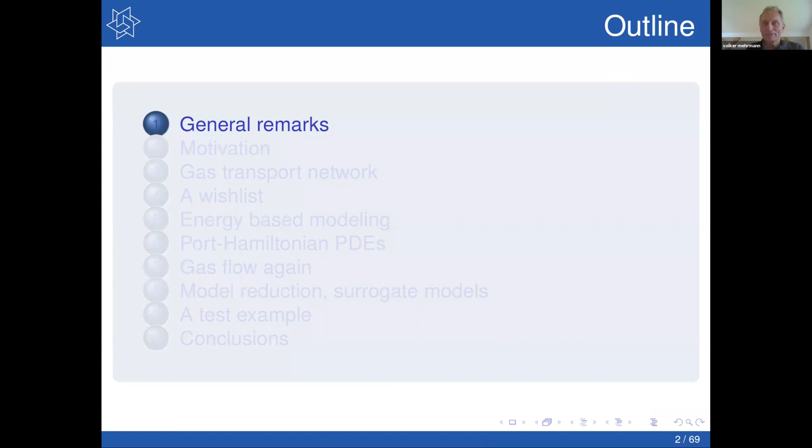I would like to talk about modeling, simulation, and control of systems, and let me start with some general remarks. We all know that most modern technologies require modeling, simulation, optimization and control of complex dynamical systems. But most real-world systems are multi-physics systems, combining components from different physical domains, also different accuracies and different scales in the components. In recent years, modeling has become exceedingly automatized, linking subsystems or numerical methods in a network-based fashion.

And the newest hot topic in this respect is the so-called digital twins, which means a real world system is combined with an artificial virtual system, and they permanently exchange data and run for their whole lifetime.

It's my strong opinion that modeling, analysis, numerics, control, optimization, and also data science techniques should go hand in hand. In recent years I have been working a lot on model reduction, and that will be part of the talk as well.

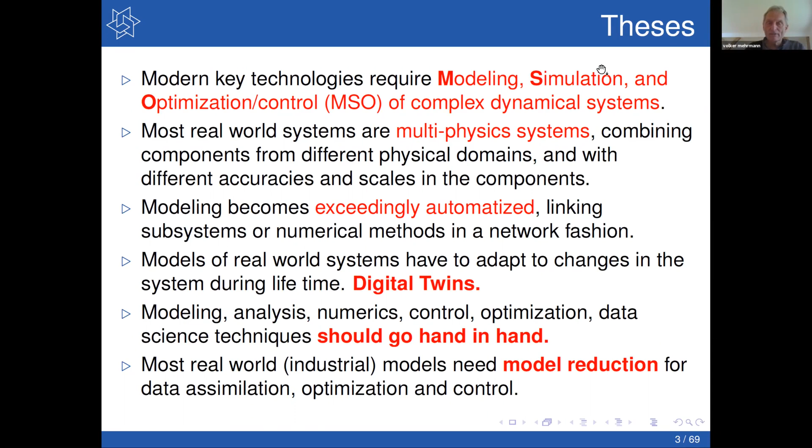So let me continue with the motivation for what I'm doing. You all know that the German government decided to move out of nuclear energy some years ago, and recently also to very much move out of coal, which means the energy supply has to be complemented by sustainable energy. I show you here a figure of the plan of the German government to increase the ratio of sustainable energy.

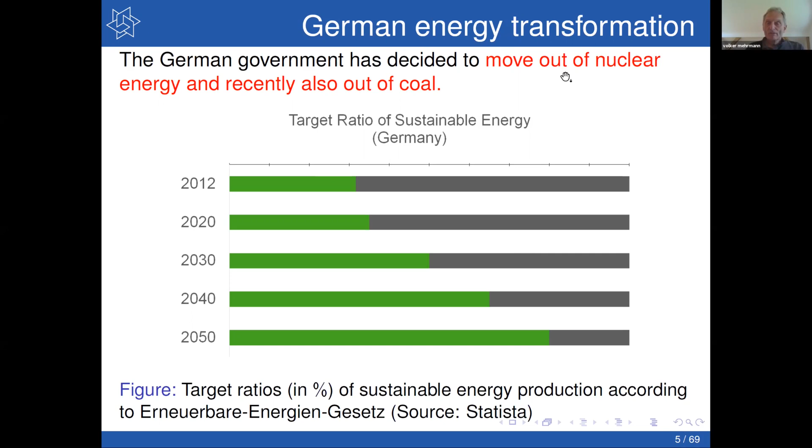This is the goal. And at the moment, if you look for example at a day in September 2018, you can see the use of energy is very much volatile. It's changing a lot during the day and during the days, and it's very different which energy source is used.

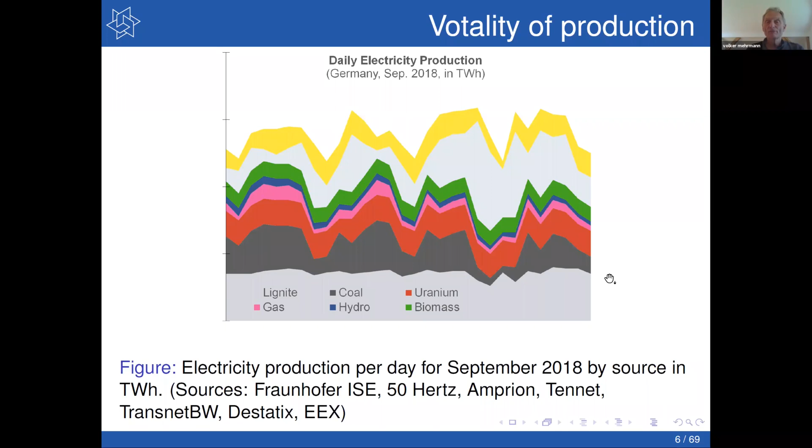Having this in mind, a certain number of challenges appear. First of all, the security of energy supply has to be guaranteed. Different energy sectors have to be coupled, for example green and fossil energy, for example power to gas and gas to power. The energy conversion should be efficient.

But when you do that and combine different energy sources, you have the problem that the different components of energy networks have very different modeling accuracy, and they live on different timescales. So, as I showed you in the picture, you have to deal with increased randomness and also decentralization. Nowadays many people have a solar panel on the roof, or there is a farm with a windmill, and things like that have to be combined.

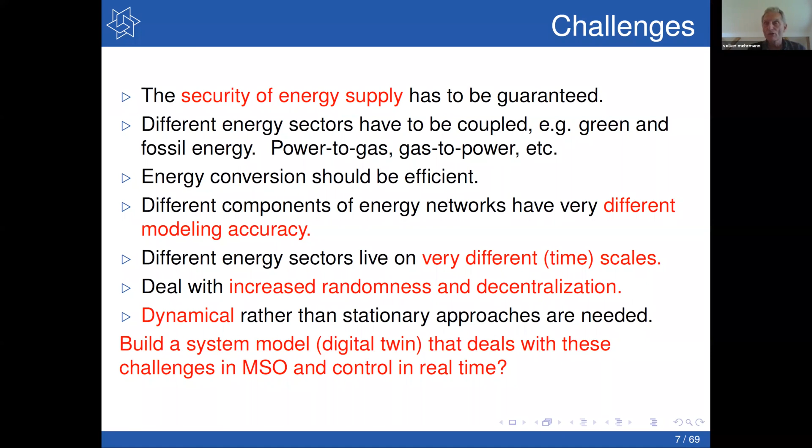And if you look at the energy system at the moment, it's mostly done in a stationary way, and so what we need is a dynamical approach. The long-term goal would be to build a system model, a digital twin, that can deal with these challenges in modeling, simulation, optimization, and control in real time. So this is the motivation for what we are doing.

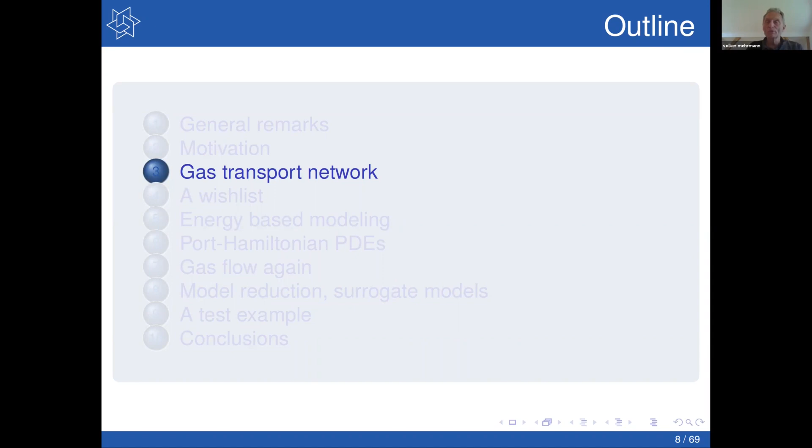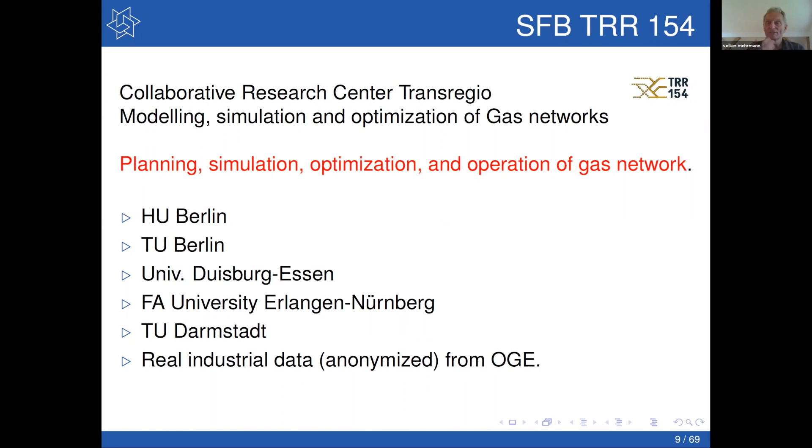As my model problem, I will talk about gas transport networks. This is a joint research project with several universities in Germany and some industrial partners. The question is, how do you plan, simulate, optimize, and operate real-world gas networks? So what does the gas network consist of? It's a large network of partial differential equations plus constraints. These are typically the Euler equations with temperature to describe the flow in the pipes. Then you have a network.

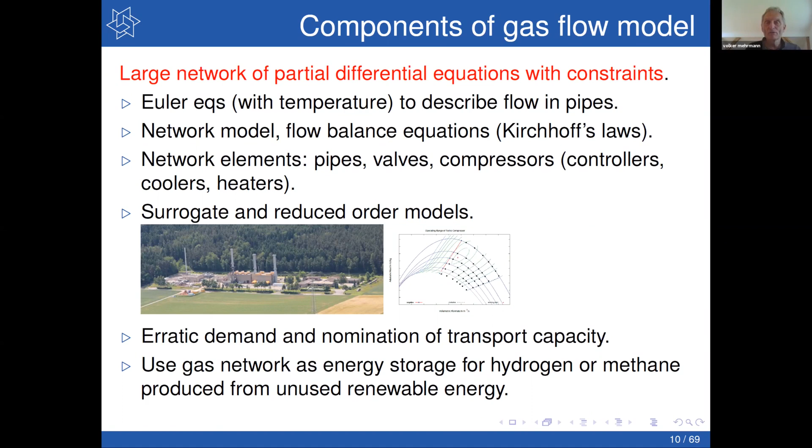Also, when you want to move to more and more renewable energy, the gas network is really a perfect energy storage for hydrogen or methane produced from unused renewable energy. The German government has just put hydrogen as a focus research point. So you can see there's a lot of difficulties here.

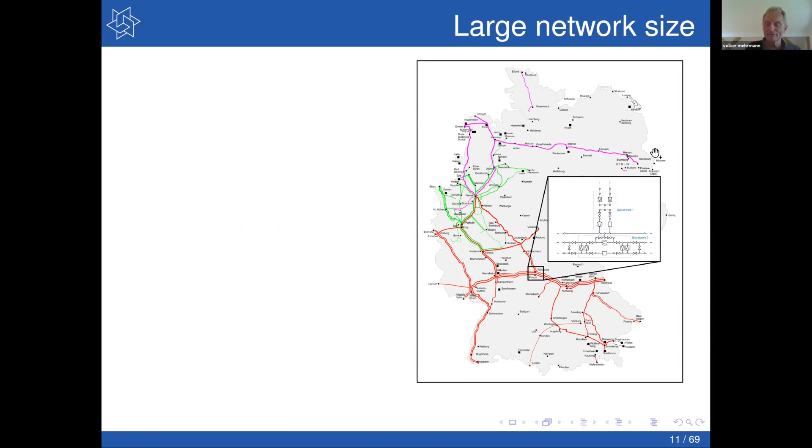Then what comes on top of it, is that such a network is huge. So this is a map of the pipelines, the major pipelines in Germany. But then if you go to this little node here, this looks like this. And then every little node in there looks like this. And then it comes to the households and it again looks like this. So you have a huge network.

So what do you have mathematically? You have a network of coupled PDEs for the flow. You have discrete and continuous PDEs for the valves, so switching. The compressor station is really given by a complicated control system that achieves a profile - that's pretty much a pure data-based model. And if you wanted to consider mixtures of, say, hydrogen and methane, you would have to go to 3D instead of 1D.

And the interesting question is, which model should you choose in which situation? How can you achieve real-time control? And then how to bring switching, delay, stochastics, and coupling to other domains. And for this, we would like to build a digital twin for the prediction and for the operation and for optimization and model reduction. So here we go.

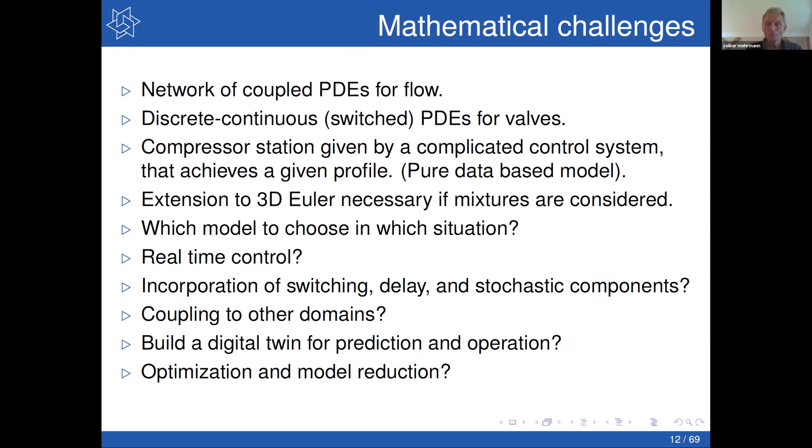So let's look at the PDEs. The most classical model in these pipeline models is the compressible 1D Euler equations. You have the equation of mass conservation - rho is the density and V is the velocity of the flow, X is the space variable, T is the time variable. Then you have the momentum balance, which includes also the pressure and the nonlinear term in the velocity, and a term associated with the friction. So lambda is a friction coefficient. It also includes the diameter of the pipe, and it's also nonlinear.

And then you have a term that has to do with the flow when you flow downhill or uphill. So there is an H missing here, where G is the gravitational force, and h, which should be here, is the height of the pipe. And then you have the energy balance, where E is the internal energy, T is the temperature, TW is the temperature of the outside world from the pipe, and KW is the heat transfer coefficient. So you have this nonlinear system of PDEs.

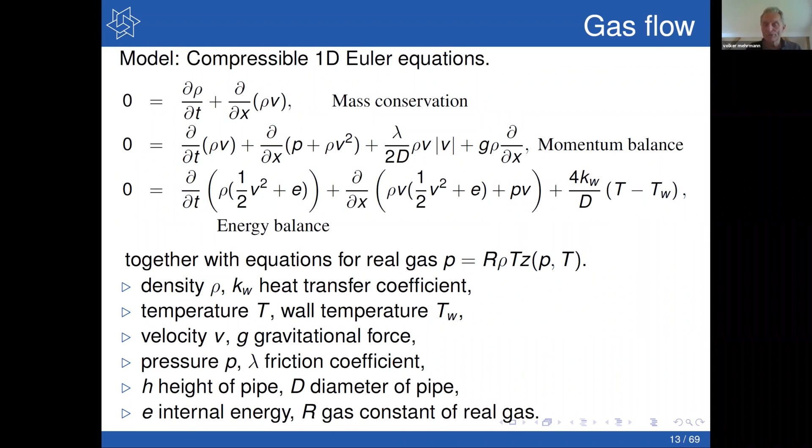You have this in every piece of pipe, and now you want to combine this with all the different parts of the system. So in our big research project, which is about 20 projects, we have taken this model, the Euler equations, and have created a model hierarchy. We take the Euler equations, and say, okay, the velocity is small, then we just drop the small terms. We could go to a simplified equation by taking that the time derivative of rho v is small. We could go to a stationary model, or we could set the temperature to be constant.

And then we have such a whole hierarchy of models, including an isothermal algebraic model, which is a so-called Weymouth equation, which is just mapping inputs to outputs. And every element or node or edge in the network is modeled via such a model hierarchy, including surrogate models, which could be reduced order models of each of these components.

And if you have such a model hierarchy, you can not only do what we are used to in the numerical solution of PDEs - space and time discretization - but you could also do model adaptation. So you could switch between the different models. And we have implemented that for a large part of the model. For example, here's a little test network - doesn't matter how it looks like.

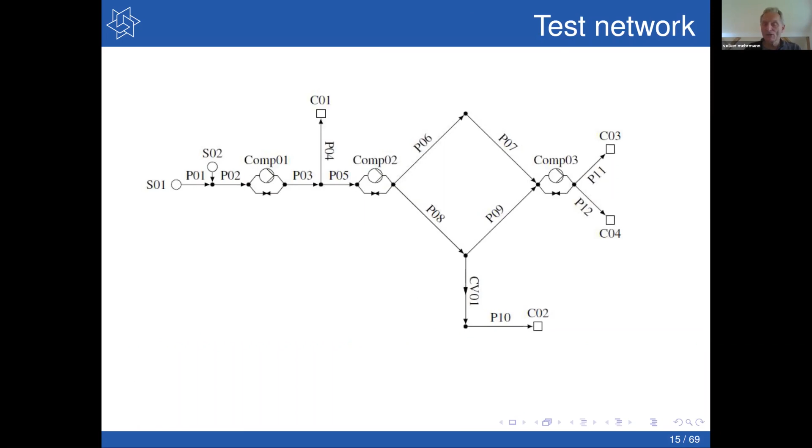We have implemented a space, time, and model error control strategy. Eta M is the model error, eta X is the space discretization error, eta T is the time discretization error, and JP is the number of pipelines. We sum the total error over all pipelines and keep it below a certain tolerance, and then optimize this cost function to minimize computational cost. If you do that, you can really reduce computing time substantially.

I don't talk about the references here. They can be found in the slides which are available for you.

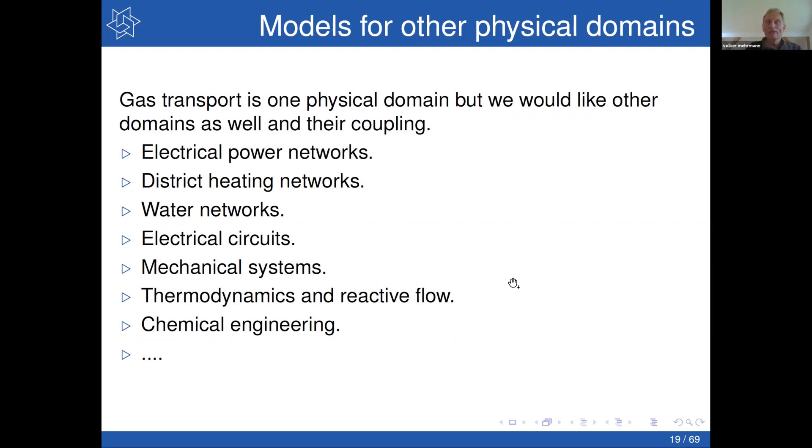What should such a model or representation do? It should work across different scales and physical domains. And we want a representation that is close to the real physics, not only for open systems, but also for closed systems.

As mathematicians, we would like to have nice algebraic, geometric, and analytical properties, and we would like to be able to analyze the model concerning existence, uniqueness, robustness, stability, uncertainty, errors, etc.

We don't know whether the variables we commonly use are the right ones. Maybe other engineers use different variables, so you would like to do coordinate transformations in space and time. Ideally, you would like to have a normal form. The whole thing should also be easy for space and time discretization and for model reduction.

Is there such a jack of all trades? In Germany, we have a very nice word for it: eierlegende Wollmilchsau, an egg-laying wool milk sow. The question is, is there such an animal?

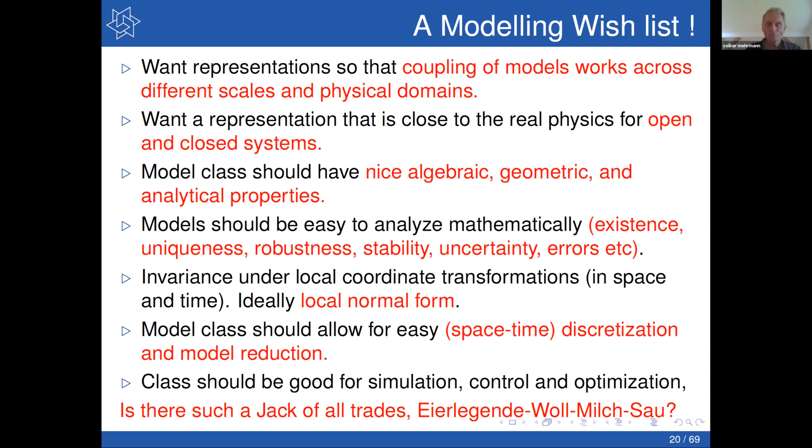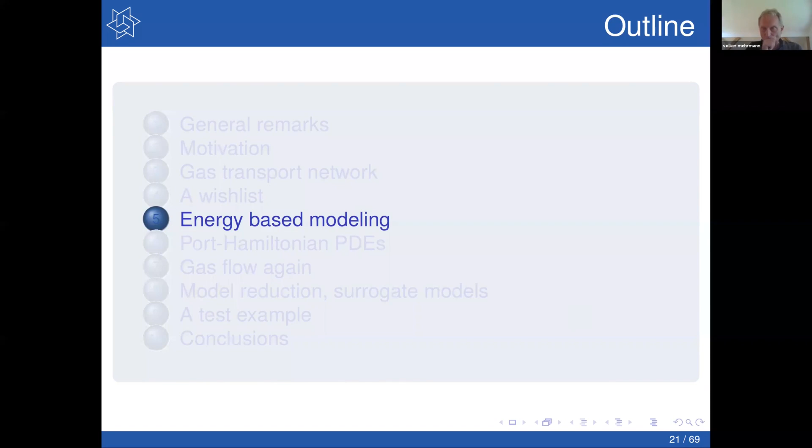The basis for such a modeling paradigm change is what is called energy-based modeling. The idea is to use energy, the only universal physical quantity, as a common quantity of different physical systems, connected as a network via energy transfer. You split the components into energy storage elements which store energy, energy dissipation elements which dissipate energy, and control inputs and outputs, including boundary conditions, as well as interconnections.

You combine them with a geometric structure, which is called a Dirac structure. We also want every submodel to be part of a model hierarchy, as I presented, of fine models, coarse models, or reduced models, continuous or time discrete.

The system theoretic approach to realize this is the concept of dissipative port Hamiltonian systems. This is about 20 years old, starting around 2000. There are some groups in the Netherlands and in France, van der Schaft, and also Bernhard Maschke from Lyon. There are also groups that do software for this, like Peter Breedveld, and groups who have worked on PDEs, Birgit Jacob and Hans Zwart.

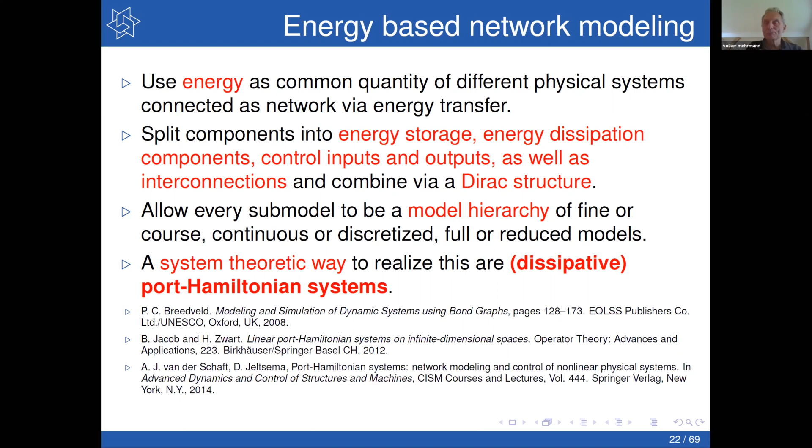I would like to tell you a bit about this approach and how we use it. For every system, you define so-called flows F, efforts E, and ports P. Then you have storage elements, dissipation elements, and a connecting structure called the Dirac structure, which always contains links describing the efforts and links describing the flows. Then you put everything together in a network.

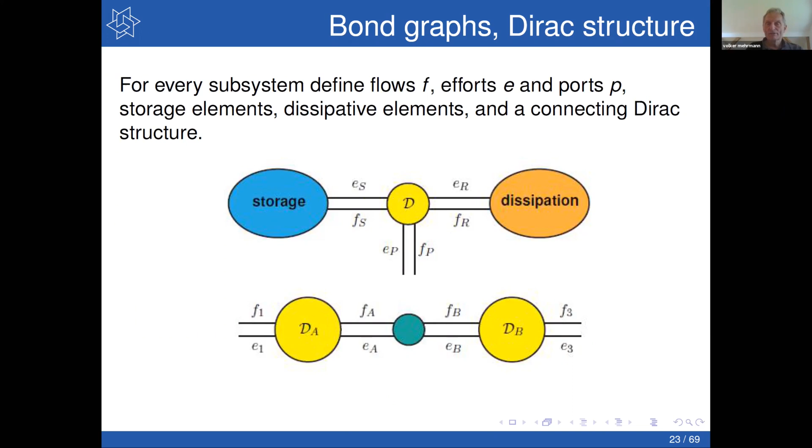Let me start from basics. What is a classical nonlinear port Hamiltonian ODE or PDE system? It's an ordinary differential equation of the form x dot equals (J minus R) times the gradient of a function H, which is the Hamiltonian. I will come to this in a minute.

Plus you have another operator here, which maps the input to the state. You have an output equation, which takes the state, here with B plus P, and then the gradient with respect to the state of H. You may have a feed-through term S plus N times u. So x is the state, u is the input, and y is the output of the system. H is the Hamiltonian; it describes the distribution of internal energy among the energy storage elements.

J is a skew symmetric or skew Hermitian matrix function which describes the energy flux among the storage elements, so it describes how energy is routed through the system. R, which is a self-adjoint, semi-elliptic, or symmetric operator that is semi-definite, describes the energy loss in the system, the energy dissipation.

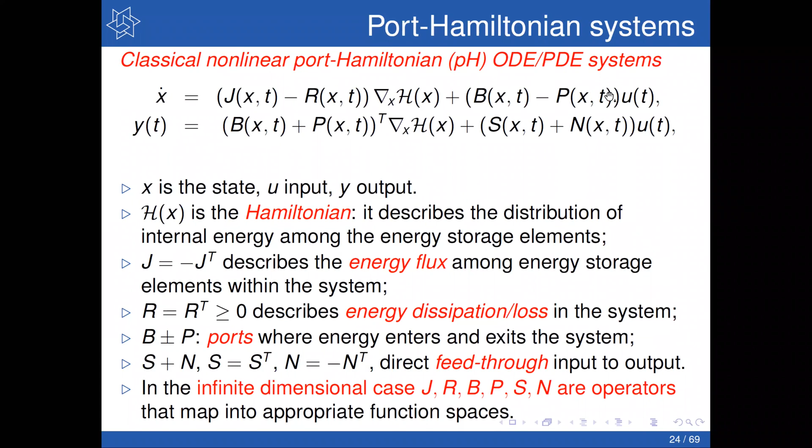And the interesting question is, why should this be a good idea? First of all, these port Hamiltonian systems generalize classical Hamiltonian systems. That's pretty good, that's already a big part of systems in physics, and also gradient flow systems, which is very common in thermodynamics.

You don't have conservation of energy anymore, but you have the so-called dissipation inequality. That means the Hamiltonian, the energy functional, at the state at time t1 minus that at time t0 is bounded from above by the integral over the input times the output. Or you could say this is a duality pairing between input and output.

And you can see if you don't put energy in or take energy out of the system, then this inner product is 0, then you have that the Hamiltonian difference is less than or equal to 0, so that's the energy dissipation. And if you don't have dissipation, then you have equal to 0, and that's the classical Hamiltonian system. So that's the first thing.

It's good that we can generalize classical physics, but the really nice thing is that port Hamiltonian systems are closed under power-conserving interconnection, so you can do modularized network-based modeling. Port Hamiltonian systems are typically stable and passive because the Hamiltonian is a Lyapunov function. And this port Hamiltonian structure you can preserve under Galerkin projection and model reduction, which is also very nice because that's what we want to use it for.

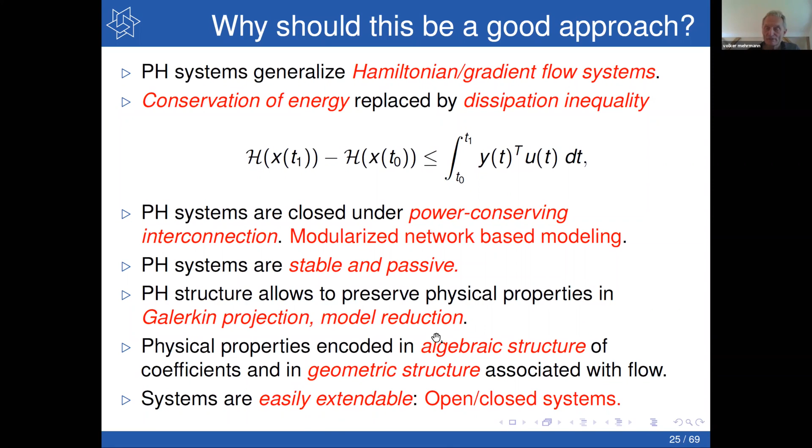And then there's some very nice algebraic and geometric structures, algebraic with the coefficients and geometric with the flow, and I will come to this. And you can easily extend these systems by adding new variables, adding new systems. So that's the classical port Hamiltonian system.

But when we have networks, we need a little bit more. We need algebraic constraints. For example, if we wanted to go from compressible to incompressible flow, then we have Kirchhoff's laws, which say flows over one node add up to 0. They could be mechanical systems with position constraints or conservation laws, other conservation laws than energy. And so you want to define port Hamiltonian partial differential algebraic equations, PDAEs.

And you want to define them in such a way that as many points as possible on the wish list of modeling that I showed you are satisfied. There have been many attempts in the last years, it's a very, very active field. And I will show you one or two approaches that we did.

So the first generalization which we did is with my PhD student, Riccardo Morandin. So you define yourself a state space and the time interval, state space X, time interval I, and you look at the Cartesian product of I times X, that is your S. And then you consider an equation which looks almost like the ODE case, but now you have an operator here in front of the X dot, and this operator can be any rectangular matrix function.

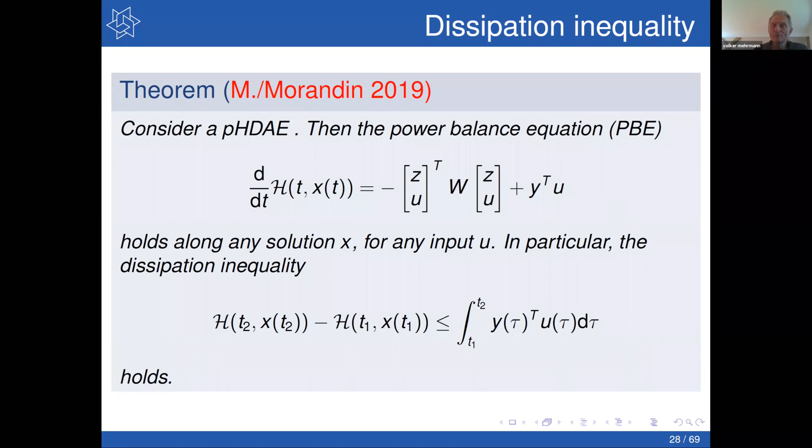Why did we do such a complicated structure? The reason is that we would like to have local or global diffeomorphisms, so we would like to do coordinate transformations. The first theorem here is that if you have such a port Hamiltonian differential algebraic equation and you do a mapping, x equals phi of t and x tilde, which is a local diffeomorphism, and you choose u as well, that is pointwise invertible, then I can do a change of variables.

I get a similar system where E tilde is E connected with phi, and then the derivative with respect to x tilde of the phi function. The J is this combined function, the R is this combined function, combining the old R with the time derivative of phi, and so on. Then this is again a port Hamiltonian DAE with a Hamiltonian H tilde, and to any solution there corresponds a solution of the original port Hamiltonian DAE with this transformation. If this is a global diffeomorphism, then the two systems are really equivalent, so there's a one-to-one correspondence. So we can do changes of variables.

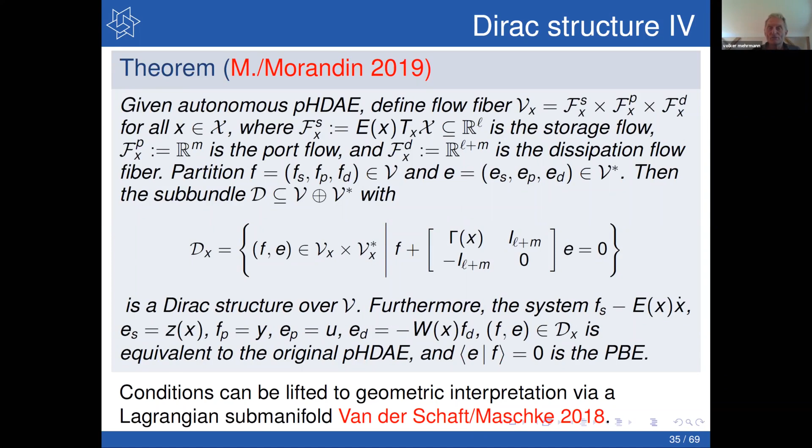And all this can be interpreted also with Lagrangian submanifolds. There's a paper by van der Schaft and Maschke that shows it. So this was just a little bit of the idea of why and how you can build such port-Hamiltonian systems.

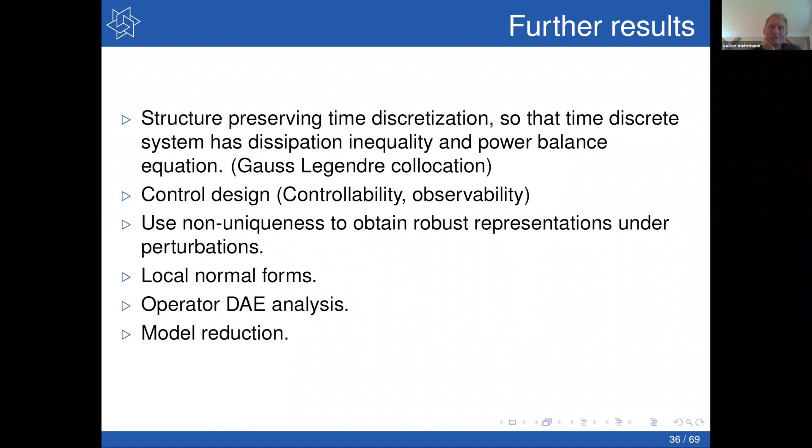We have done a lot of work on this in the last years. We have looked at time discretization, so that the discrete time system has the same dissipation inequality and power balance equation, and so far the only methods that do that are Gauss-Legendre collocation methods. We have also discussed controllability and observability. There is a non-uniqueness in the representations, so there's this change of coordinates that you can do, but there's also other non-uniqueness, and that you can use to make a very robust representation. And we have derived local normal forms, and we have also done operator DAE analysis.

So just a simple case: let's look at the case that we have a constant coefficient system. It would look like this: you have a matrix E here, and let's look at the square case. E x dot equals (J minus R) times Q x, and this is with a quadratic Hamiltonian, plus the input and output equation. And now Z is Q times X, and E x dot, there's no K term because you have constant coefficients.

And this operator, actually this term shouldn't be there, so this operator without the K here should be skew-adjoint. This inner product should be semi-definite, and this matrix should be semi-definite if we have a Hamiltonian like this. I will come back to this for a second to just give you a few results.

For example, you can easily get very nice results about the spectral properties of such an operator. If you have such an operator, you look at the matrix pencil associated with this system, lambda E minus (J minus R)Q. If you have an eigenvalue of that pencil, then the real part is less than or equal to 0, so you are in the stable regime. If you have an eigenvalue on the imaginary axis, then it's semi-simple, except for 0. And if the columns of V form a basis of the deflating subspace, then the dissipation RQV has to be 0. So the 0 eigenvalue is really associated with something which is in the kernel of the dissipation operator. And then there are eigenvalues at infinity and 0, and they can have at most Jordan blocks of size 2.

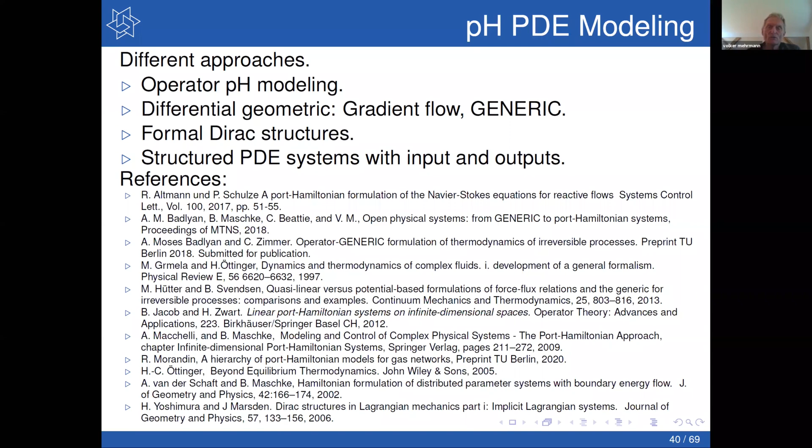So the abstract port-Hamiltonian operator-like formulation. Now I forget about the E here for a second, I will come back to the E a little bit later. So take the ODE-PDE formulation: I have a state variable Z, I have J minus R, then I have the Fréchet derivative of the energy functional, and I have an input operator and an output operator.

A state space would be something like Sobolev space W13, living on an interval 0 to L into R3. J is a skew-adjoint operator. R is a self-adjoint semi-elliptic operator. And B is linear and continuous, for example mapping from U, a subspace of LQ, into LP. The system-theoretic output is denoted by Y, and E here is a relative energy. If you want to read more about this, there's a paper by my student Ari Badlyan, and Bernhard Maschke, Chris Beattie, and myself.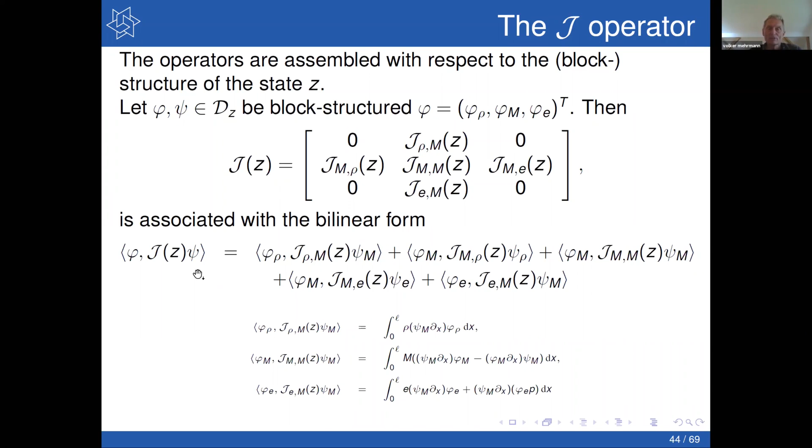As the derivatives with respect to the density, with respect to the momentum, and with respect to the internal energy. And you can also put the operators in a block form, then you get a J form, and it takes skew-symmetric parts which relate the density and the momentum, and momentum to energy. And you have a bilinear form associated with this. This is probably too small for you to read, but you do multiply with test functions in the usual way and get this bilinear form associated with this skew-symmetric operator.

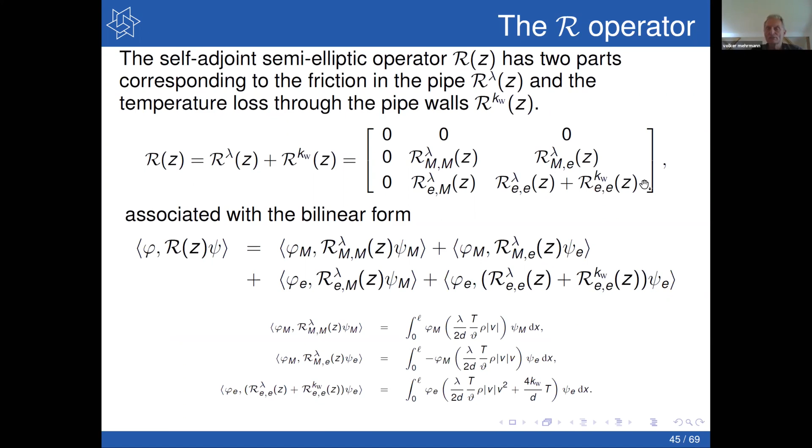And you can do a similar thing for the dissipation operator corresponding to the friction in the pipe and the temperature loss through the walls. It's a semi-definite block matrix function, operator function, which has a component with respect to momentum to energy, and then here the term associated with the dissipation of energy, and again a weak formulation.

Then you have to do something with the inputs and outputs, and I'm going to skip that, but you can define output and input operators. And in the equations, we had the Euler equations before without the entropy equation.

So what you do is the operators have to be constructed in such a way that they satisfy so-called non-interacting conditions. So J times the derivative of the entropy part is equal to 0, and the R lambda, the friction times the derivative of the Hamiltonian part is equal to 0. It's very important that you do this, so that the Hamiltonian and the gradient systems do not overlap.

There are ways to overlap them, but then it's much more complicated. It's very important which state variables you choose, in interplay with the energy function, to get the physical properties directly encoded into the system. And there are many simplifications that one can do, like going to incompressibility, but it's not straightforward.

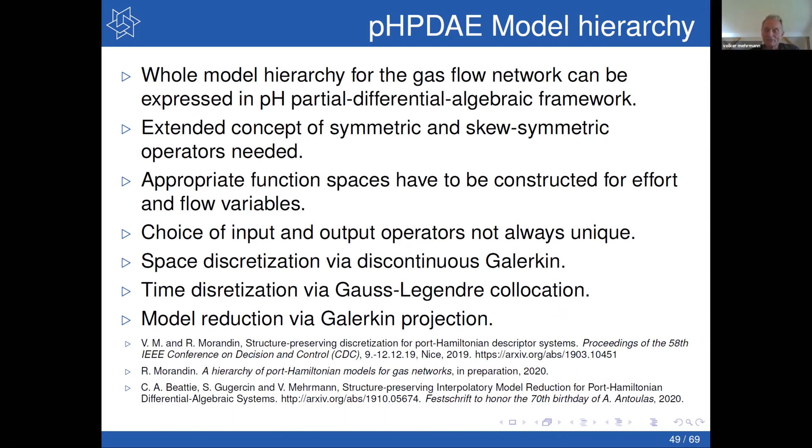Let me tell you a little bit about model reduction. There is a bit of a problem because of the constraints. You want to replace the fine model by a surrogate port-Hamiltonian model, possibly also from input and output data, but you don't want to modify the network structure. And Kirchhoff's laws, so the balance equations, must still hold after reduction, along with other constraints if there are any.

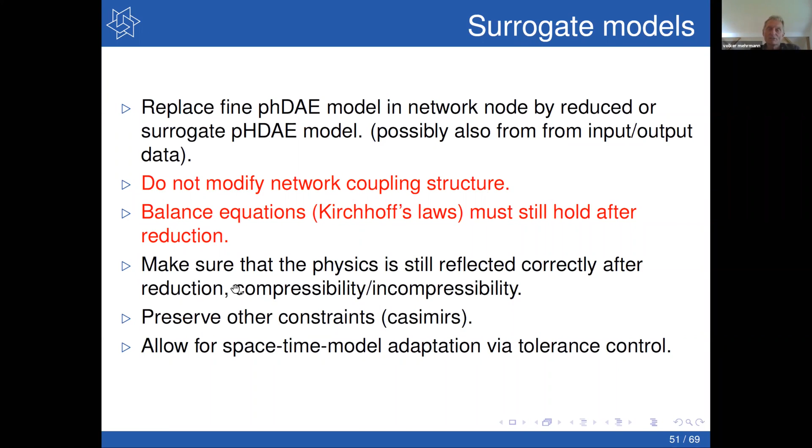And what is model reduction? You take a system, written here in implicit form, depending on the state, discretized, the input, and the derivative of the state, with initial conditions and an output, nonlinear, and you want to replace this system by a smaller system where the dimension is much, much smaller.

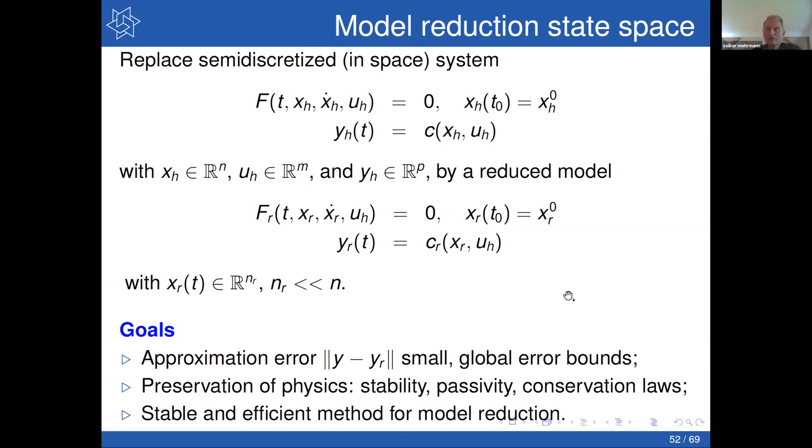The output errors should be small. You should have global error bounds and preserve physics. And you want to have a stable and efficient method. So let me show you this for port Hamiltonian ODEs.

So you have such a system in the simplified form where the gradient is Q times X, a quadratic cost function. If you have that, you make just the standard ansatz.

That X is projected into a finite dimensional space VR, and that QR, Q is the derivative of the Hamiltonian, QR XR is projected to a small energy function, which is W times Q. You do a congruence transformation with W on J and R to keep symmetry, and you make sure that W times V has this orthogonality.

You do this with the input function, and if V and W are appropriate orthonormal bases, then you get again a port Hamiltonian system.

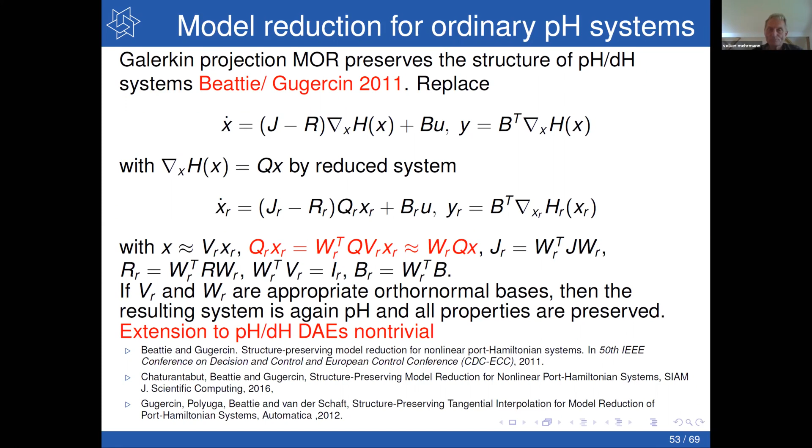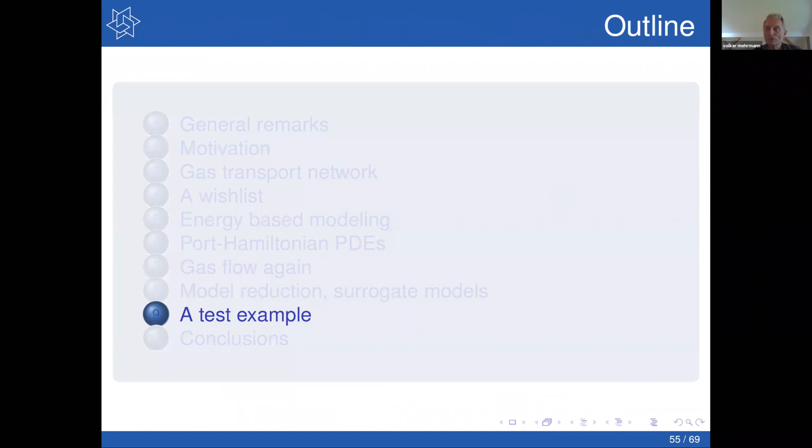And let me go to a test example. So this is one of the systems in the hierarchy. This is the propagation of pressure waves on the acoustic time scale in such gas networks.

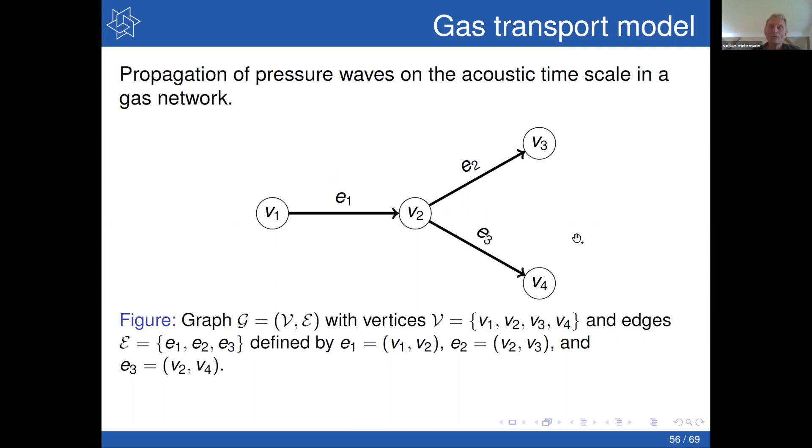Take a simple network here, 4 nodes and 3 edges. You form a graph with vertices and edges given by this. You write down the conservation of mass and balance of momentum. Your Z variable is the pressure and the mass flux. You get this transport equation here in first order, where the coefficients have all the physical properties of the pipe, like friction and everything in there.

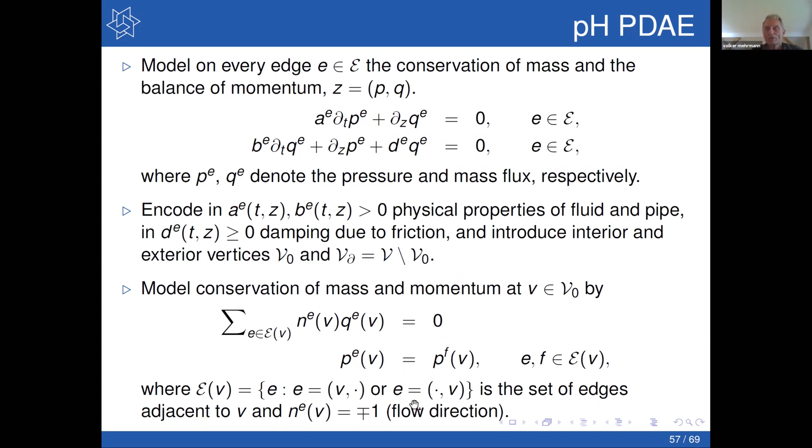Then you add the Kirchhoff's laws, so the conservation of mass and momentum, and you add inputs and outputs. The output is the mass flux in and out of the network via the exterior vertices, and the input is the pressure on the edges in the beginning.

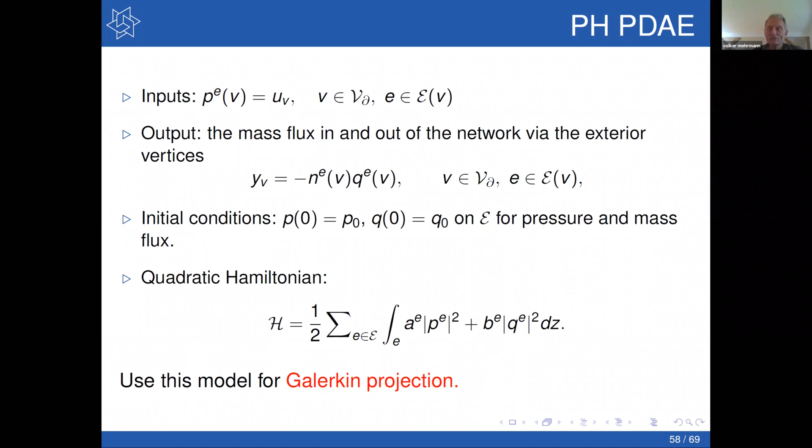You take initial conditions for pressure and mass flux, you take a quadratic Hamiltonian, and you use this for Galerkin projection. And what you get is a system which looks exactly like the one we had. Q is the identity, that's good. E is such a singular matrix with 2 mass matrices here.

J is such a block tridiagonal matrix, which is skew symmetric. R has just the friction damping term. Input is just here in the second equation.

And in a paper by Egger and Kugler, they have done the analysis of convergence, the error estimates, and the stability. And for this, you can do everything that I suggested. You can do model reduction via moment matching. You check the well-posedness, the conservation of mass, dissipation inequality, exponential stability. We have constructed special Krylov methods to satisfy the algebraic constraints.

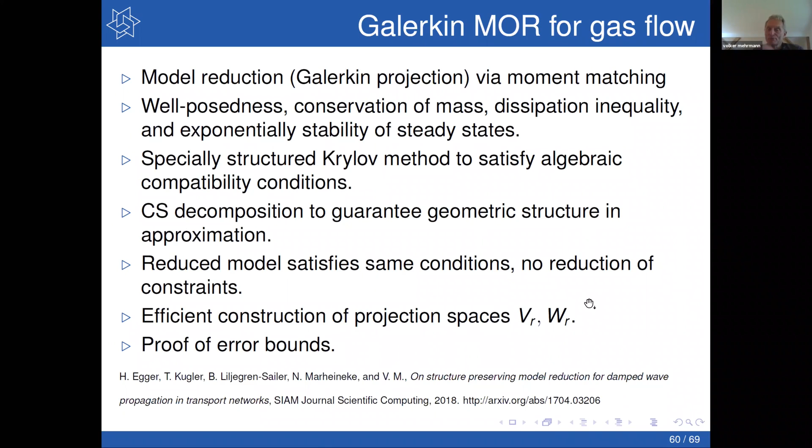And we had to add a little bit extra to guarantee the geometric structure. It's a so-called cosine sine decomposition. And the reduced model satisfies the same condition. We don't reduce the constraints, and we have efficient methods to compute these projections, and we've shown error bounds.

And here is a little bit more realistic example, and I'll show you these figures. So in the first row, we have taken dimension 2, 5, and 10. We started from 10,000. We have 2, 5, and 10. And the blue is the truth, and the red is the approximated model.

And if you add more and more damping, you can even do it with 5 in a very accurate way, or with 2 in a very accurate way. So you can get reduced models which are very small, and you can use them for control.

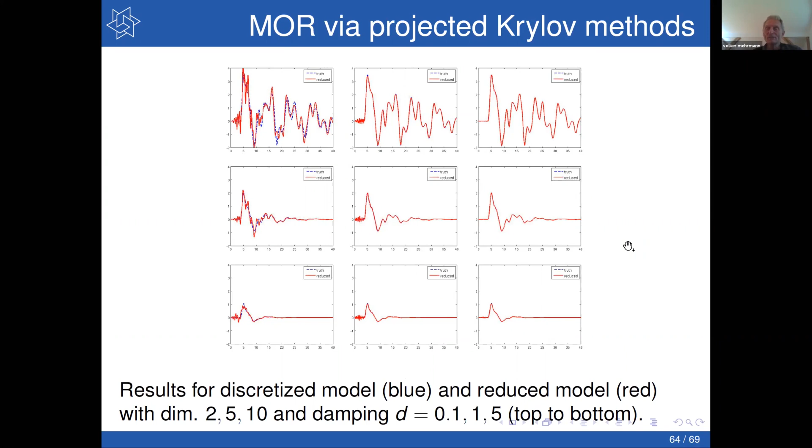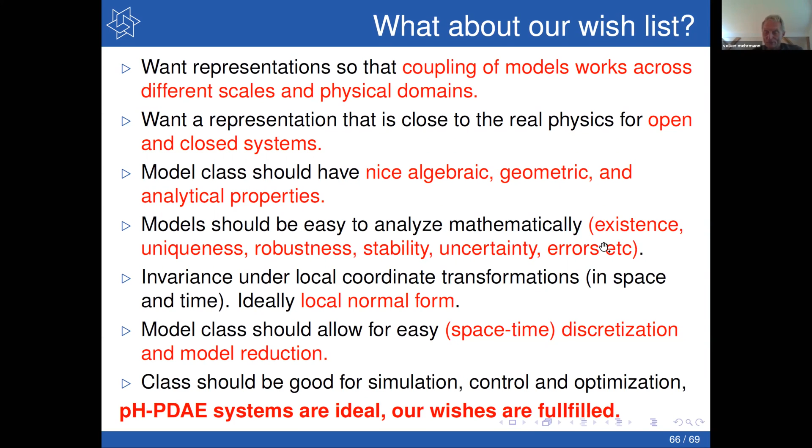We have this wish list. And if you look at the wish list, Port-Hamiltonian partial differential algebraic systems are an ideal class of problems, and our wishes can be fulfilled. But there are many things to do.

Real-time controllers, we're working on that, and optimization methods. Other physical domains: we've been doing power networks, heating networks, electrical circuits. What we have not done is incorporate stochastics in a good way in the model. That's an open problem. Stability analysis, we've worked on it in the constant coefficient case, but we would like to do this in the general case. We've done some error estimates, but more is needed.

Preconditioning is needed. Data-based realizations and software production, we're working on this. Recently, this stuff goes into a big research project on creating digital twins in the Werner von Siemens Center, Berlin, which is a co-project between industry and the technical university.

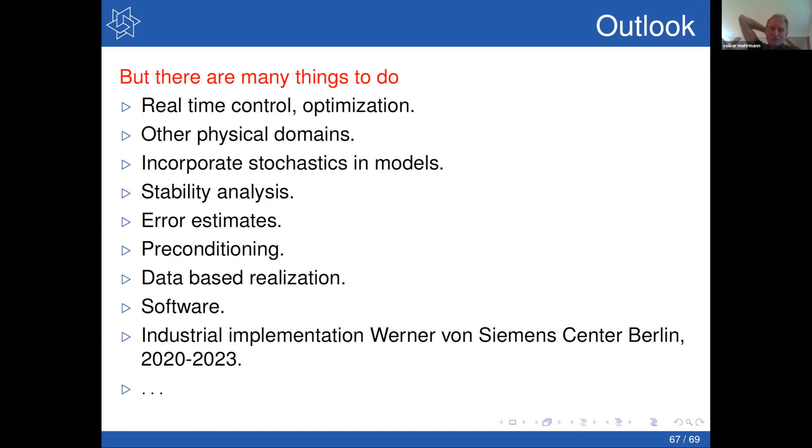And with this, I would like to close and thank my sponsors, in particular the ERC Advanced Grant, which really started this whole development for me. The Research Center Matheon, the Einstein Center, the Excellence Cluster Math+, several collaborative research centers, and the German industry, Ministry of Science and Technology with the project IFA.

If you want more, you can go to my website and find all of the papers there. At the end, I would like to make a little advertisement: hopefully, depending on Corona, we will have a thematic semester on energy-based mathematical methods for reactive and multi-phase flows. Please have a look at the Math+ Center for student conferences and other conferences.

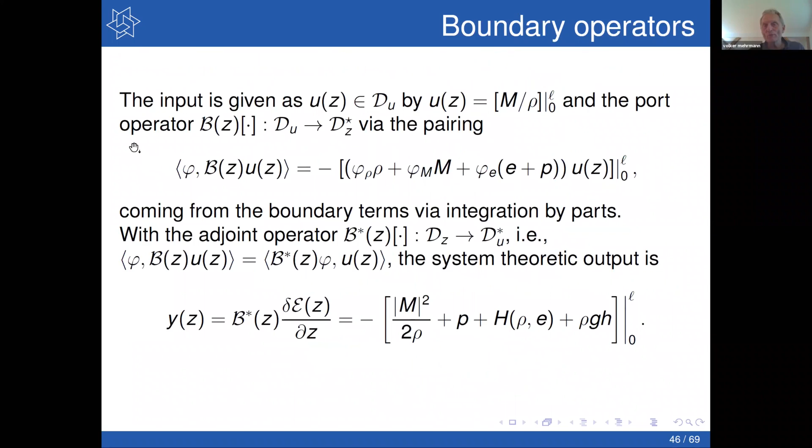Maybe to start, I have one question concerning the non-interacting condition that you quoted on page 47. Is it natural? Is it easy to get? You said it is very important to have it. Yeah, it is. It's one way when we try to link to this GENERIC framework, a differential geometric way of dealing with thermodynamics, and there we needed that. Whether it's really needed, we don't know.

At the moment I'm debating with myself whether we really need it, but it would be great if we could drop it. So far, I don't know. In the generic framework, you have them. So if you want to really put a one-to-one correspondence to the generic framework, you should have in your formulation these non-interacting conditions, but maybe we can be more general and drop them.

Okay, and is it natural, and is it easy to get it? In particular, when you reduce your system, is there a natural way to maintain this non-interacting condition? Yeah, the first question, yes, it's very natural in the way—if you have gradient flows, this is always how it is set up. Whether in the coupling it's really natural, I don't know.

I actually don't think so. But we couldn't prove the results linking to the generic framework without constructing the operators in such a way. And it's mainly the boundary operators which make trouble here—how you put the energy from the boundary into the system.

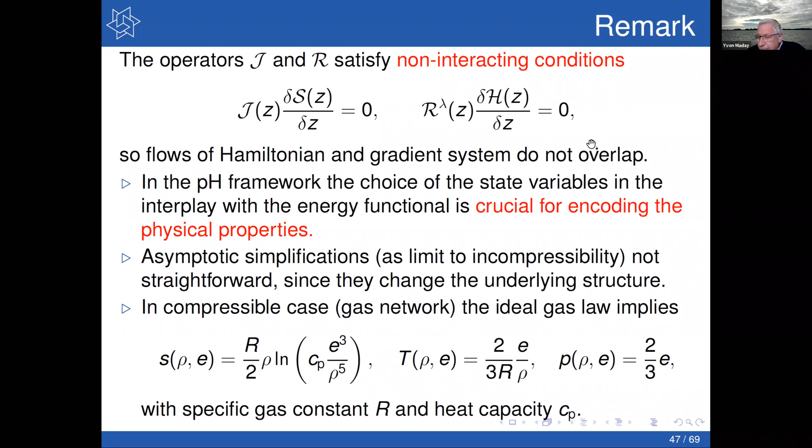And also on page 54, is it related? You spoke about having the proper projector for the Galerkin approximation—is that related to this non-interacting condition, or? It is partly related to the non-interacting condition, and partly related to, if you have Kirchhoff's laws for example at a node, giving you the E term—this would be the network matrix—then afterwards you want that you don't gain or lose energy at a node. So the algebraic condition that the sum of the flows should add up to zero at a node has to be guaranteed, and so the projectors have to satisfy that.

And that is extra work that you have to do. I did talk about it in Providence a little bit, but it's extra work, and it's not trivial to get this. And if you have other constraints like conservation of momentum, and you want the reduced system to also conserve momentum, then it's an extra constraint equation on top of the port-Hamiltonian structure itself, and you have to work for it.

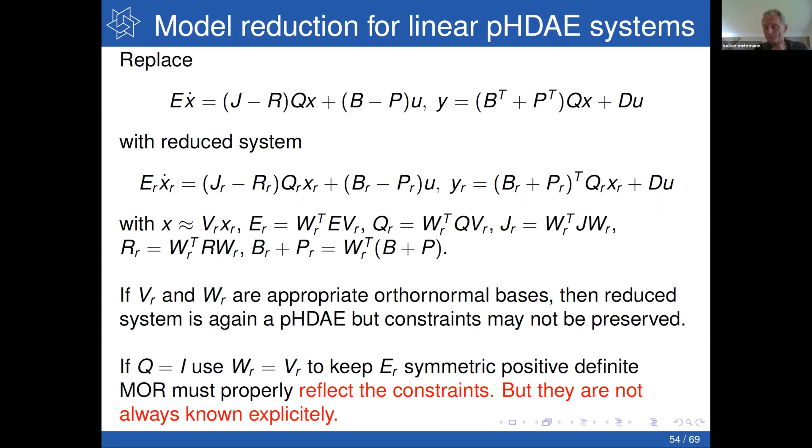Okay, I have another question concerning the adaptivity of the model. So at the beginning, you spoke about an error for the discretization and for the model. So do you have an error estimator for the model?

Yes, we do. Actually, we do an error estimator when we do this simplification for each step here. So setting something small to zero, we say, what sensitivity do we have there? What effect will it have on the results?

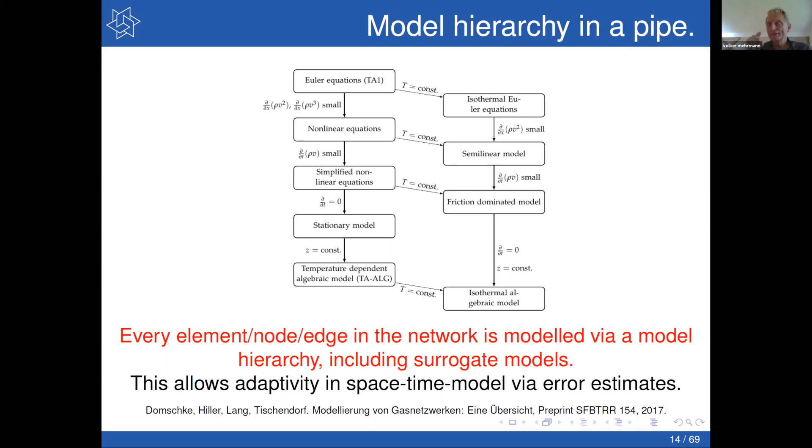And we always compare with the Euler equations as the ultimate model, which we assume to be the truth. There could be another truth, which is a more complicated model. And so in each of the cases, we look at the sensitivities, what happens if we set the temperature to be constant, and we compute first order sensitivity terms in each of these components.

And for example, when we do the optimization, in this case, we look for a feasible solution. If we get a feasible solution with a low model, fine. If we can't get a feasible solution to a certain tolerance, we lift the model up, either go to finer discretization or a better model, assuming that we can control the truth.

Or optimize the truth, and then we can show that if we can optimize the truth, this will give you an efficient method. So we can always bring the error in space-time and model below a certain threshold.

What is a feasible solution? So, for example, you want to minimize the compressor cost. You want to do a step into, say, the gradient direction, and the gradient goes up. Then you don't have a feasible step. So when the gradient goes up, you reduce your step size, or your time step size, or you lift the model.

Okay, so it's really in the optimization code, the feasibility. And so you are able to balance the discretization, the model, and maybe...